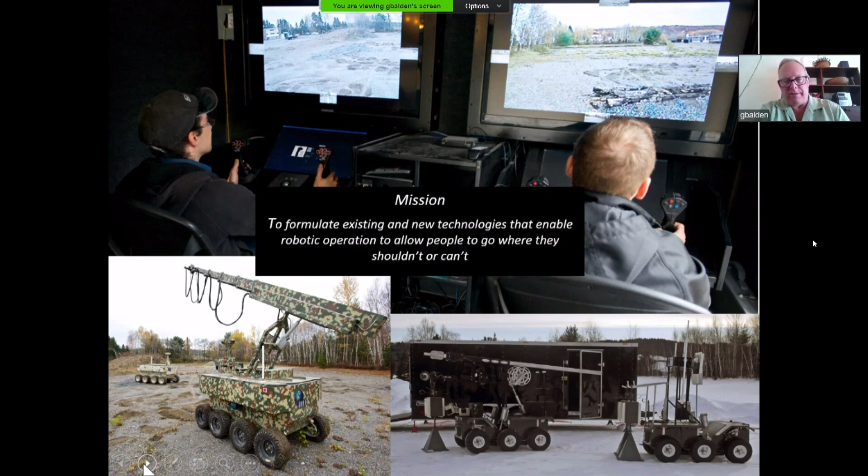Those images are extremely valuable. Like you heard about in the agriculture business, things like looking at the rock for its quality and for what's in it, and being able to use the sensors to scan those things with color and density and magnetism and others help us to determine what's going on.

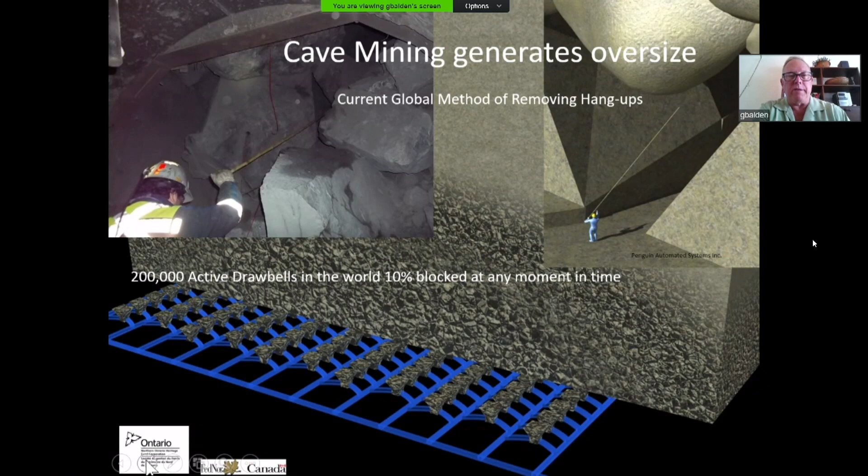This entire machine and robot system have many innovations in them, but the key is to bring down that blockage.

This is what that robot kind of looks like in animation, deployed, so that we drill a hole in the large rock to break it up.

I'm going to try and see if my video works, Nathan, over this link, and you can tell me if it works well or not.

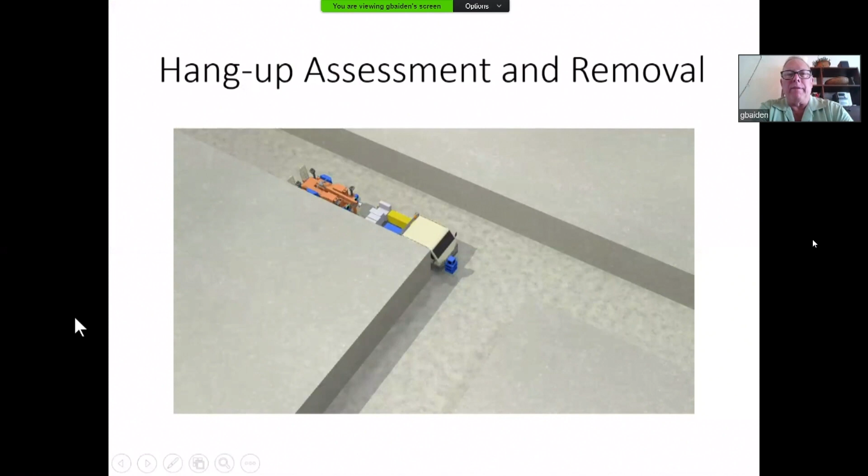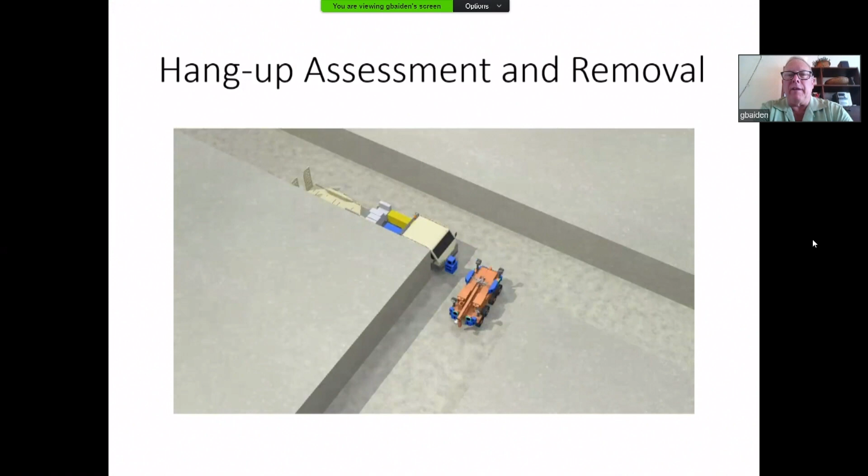This is a video of how that process has to work. The machine has to drive in and deploy the robot. Once the robot gets into the tunnel, it would be there for a fairly lengthy period, and the main command center would come back and run that robot optically out into the area where the blast zone is.

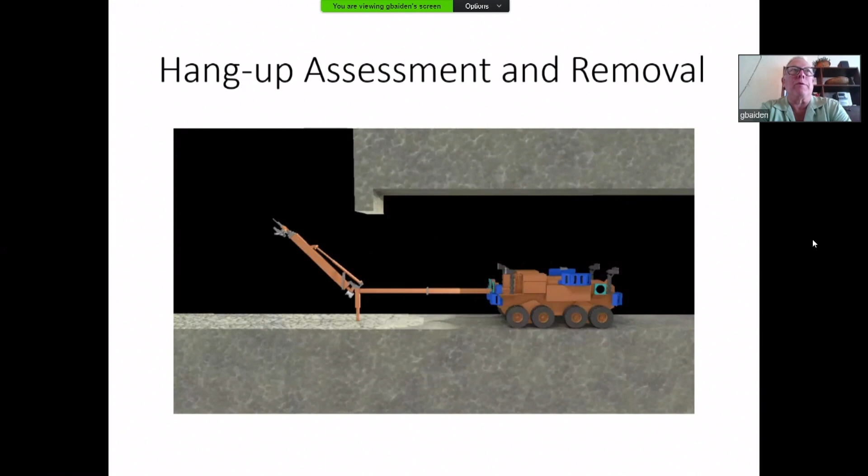When you're blasting underground, you have to make sure that people are safe, and you also need situational awareness for the robot to be able to deploy itself and get out into the area. These kinds of specialized robot arms are very difficult to build because they have to fit inside an opening that's only 3 meters high. You need special extensions to figure out where to put the drill hole, align it, drill a hole, and then blast it.

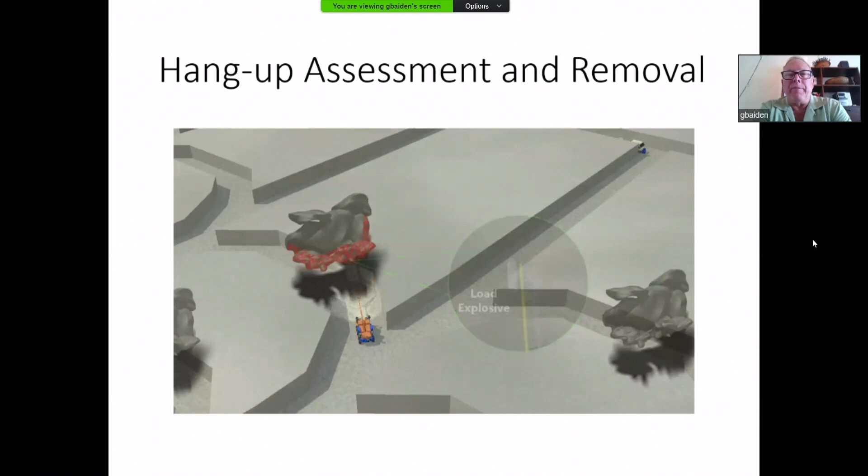Once those rocks come down, the whole production cycle is able to restart again because the blockage is gone. You'll see the blast in just a second.

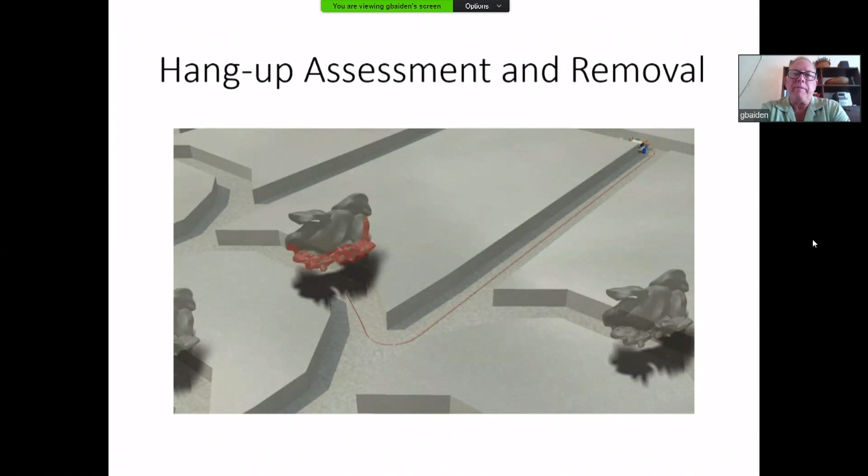This is a different view of the same thing, but it shows how the sensing system we have on board is trying to pick different rocks at different levels to be able to put the robot arm to and load the explosives. This is one of the areas where we use specialty imaging and special scanning systems.

These systems allow the robots to pick where they are and where they should go. You see the red robot deploying itself to match where the purple robot is, and once it gets into the right position, it can go and do its job.

This video shows you that the kind of robots we build are not really like Roombas. These are very large machines of several tons. In fact, they're more like robotic tanks. The robots have to be able to turn on a dime because they're like a turret on a tank, to be able to get those robot arms in place.

The robots have to be able to get those robot arms in place, and the operator has to use the cameras and all the sensing systems to be able to operate them successfully.

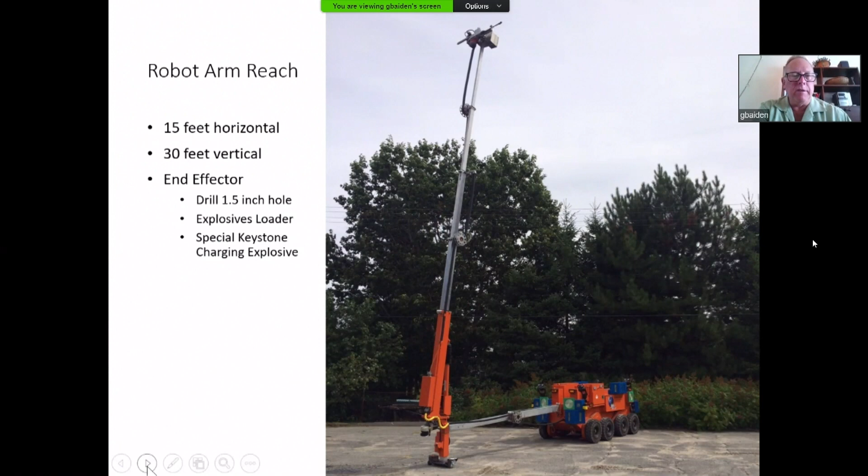We build several different kinds of robots. They range from a 60-centimeter diameter robot to go into sewer tunnels, which I heard spoken about. The sewer tunnels need to be able to not only have the robots deployed, but they need to scan them for what they look like inside and be able to take samples of the water, the gray water that they're in.

We also have a 2-ton machine, and you just saw the 6-ton machine, but all use exactly the same control systems to be able to do their work.

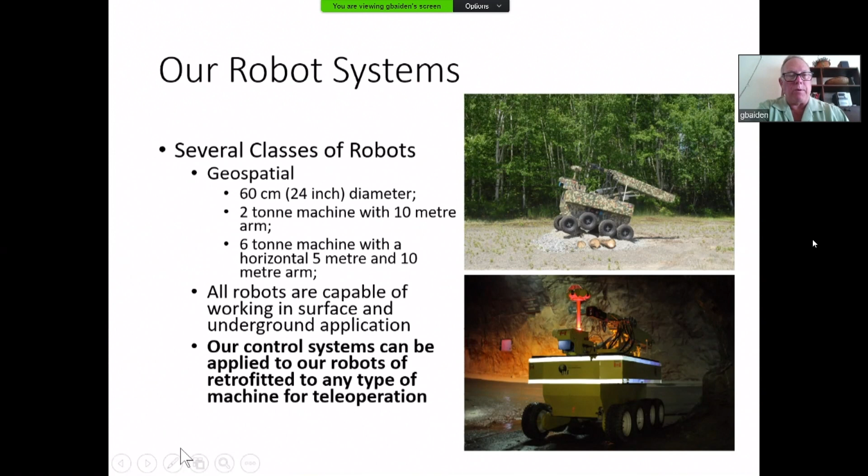I want to tell you about a different technology we had to put in place, which is a cooperative robotic system. In this bench, there was 200,000 kilograms of explosives at 300 kilograms per hole. One of the holes went off prematurely, and we got called in from a safety perspective to try and dismantle this pattern.

The idea, which you see here on the left, was to build a containerized system with these 3 robots. When we were finished, this was the portable command center and the robots that were built. We get into things with very tight timelines, so this entire system had to go from idea to solution in less than 10 weeks and be deployed.

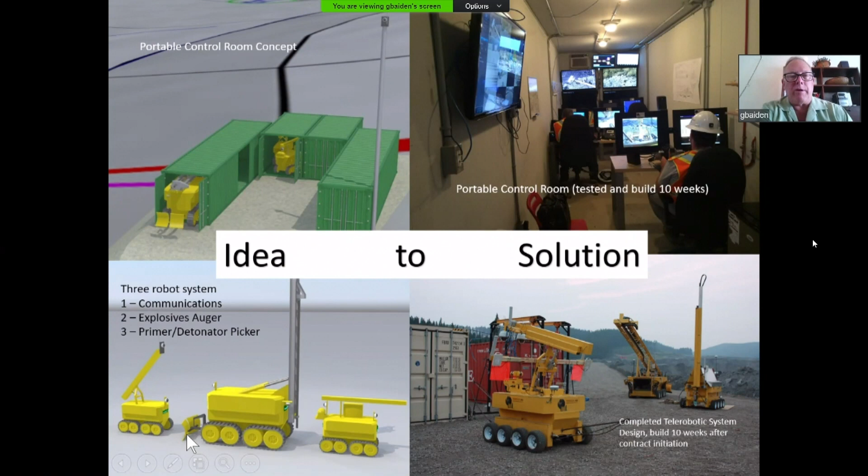When we did our work, you can see the robot I showed you in the original picture driving out, and it had to drive almost 3 kilometers to get to site from our command center. And you see all the robots here in our command center, taken from the robot looking back.

We had to try and determine the temperature of the holes you see up here. There were 575 holes that had to be monitored for temperature, and then these robots would have to dismantle the explosives from them.

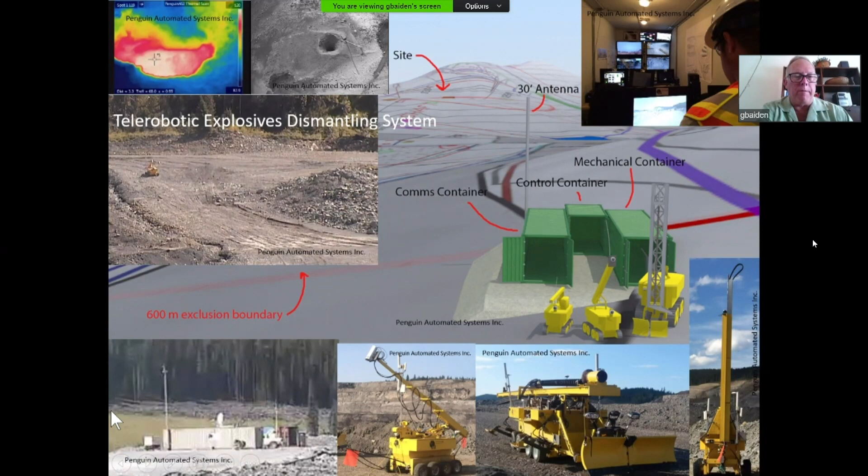The last little bit I'm going to talk about is, well, I've been in the mining business. We've been working on the next generation of mining for space. Probably about 15 years ago, I wrote a strategic plan for the Canadian Space Agency on how to mine the moon. So this slide is for a new business we have called Shackleton.

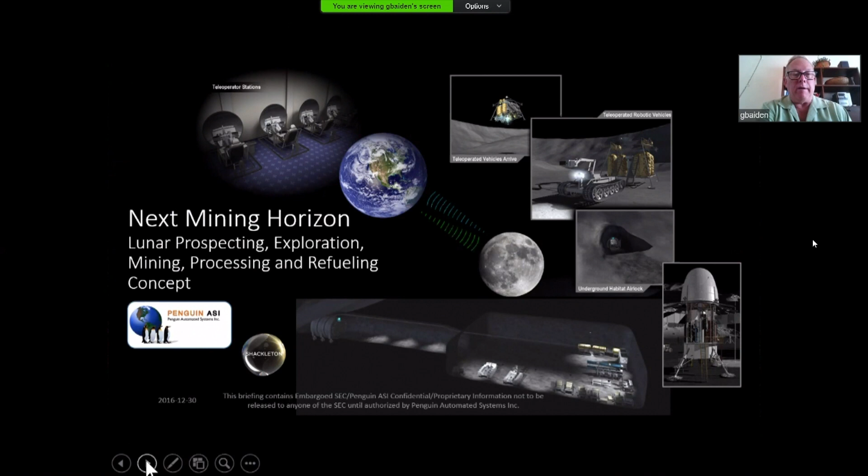The idea is to build teleoperated lunar mining equipment that's run from Earth, up in space. These kinds of machines you see in the corner, and these kinds of robots for making oxygen and bringing it back to low Earth orbit, are the kinds of future mining that are going to take place.

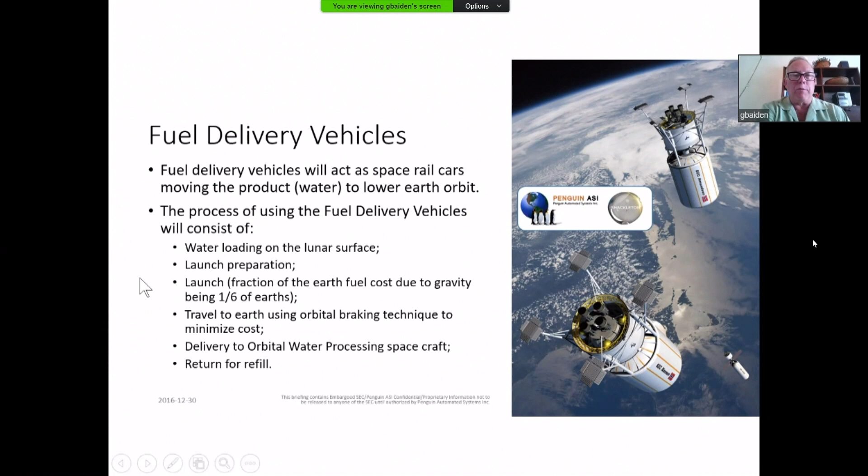As well, we have to make rail cars that are going to have to work in space, and these are some of the fuel delivery vehicles we looked at, in terms of how we would deploy and operate them using the same robotics technology we're all talking about today. And these are some of the space techniques for how to bring those rail cars back to Earth.

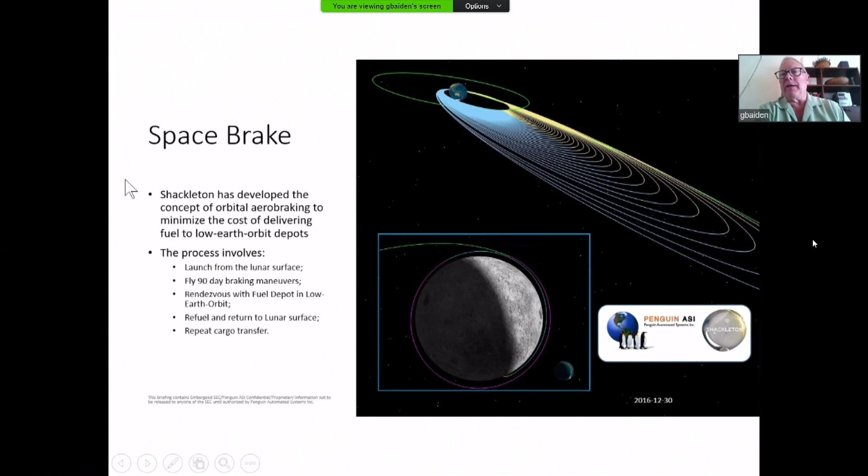One of the very important things, from a friend of mine, Dr. Bill Stone, is to build a space brake to get those rail cars back. And then once they're there, we have to process the water to be able to make it rocket fuel.

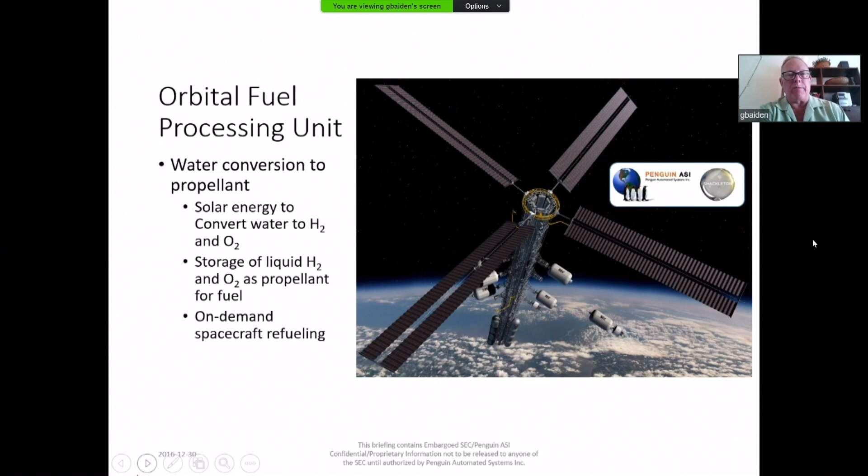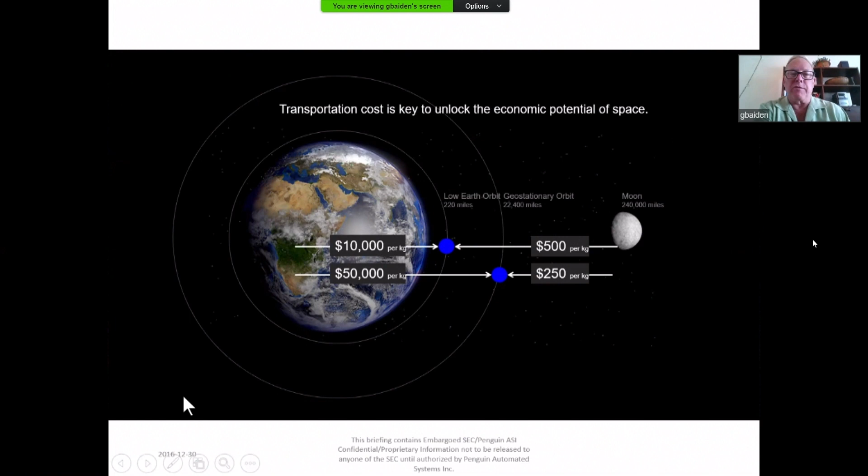The reason we would do all that is because today, to bring water from Earth to low Earth orbit, which is where our satellites are, would cost $10,000 a kilo. But to do it from the moon back to low Earth orbit is only $500 per kilo. So there's a huge future in economic development of space for mining once we have the kinds of robotics technologies we need.

So with that, I'll try and have, as best I can, a conversation with you guys. But that's the team of people that have been working on that. And I want to thank you for your attention.